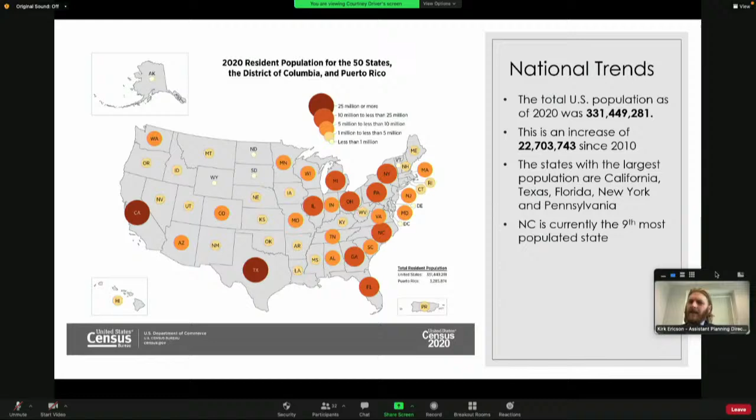That being said, despite those large absolute numbers, the US population grew at its second lowest rate of any decennial period since the census began in 1790, at a rate of 7.4%. The only period when growth was slower was during the Depression era of 1930 to 1940, and it was only 1/10 of a percentage point lower. So we've got some slowing growth as a country, and analysts are pointing to an aging population, decreased fertility rates, and reduced immigration from other countries as the reasons for that slowdown. Next slide.

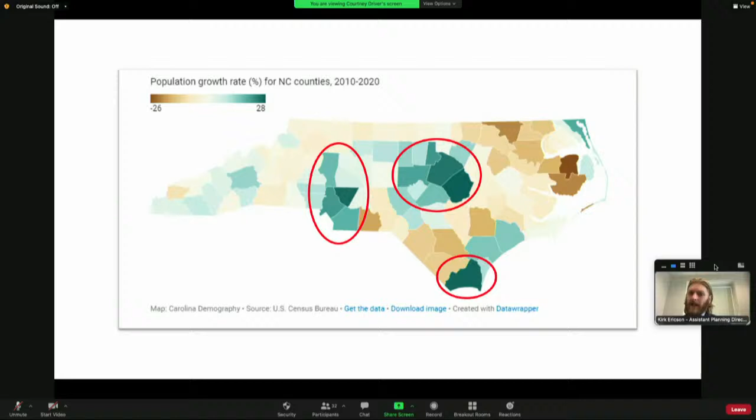Next slide. This is just kind of a visual representation of some of the things I was talking about. You can see those dark green areas are where population growth is the most significant. Again, there are major clusters in the Charlotte region, Raleigh, Durham, Chapel Hill, Cary, and New Hanover and Wilmington, that area, with serious population declines in the northeastern part of the state and the more rural areas surrounding the big regions in North Carolina.

So now I'm going to get into some detailed information about Winston-Salem and Forsyth County. This image shows Forsyth County as the backdrop. The yellow line represents the Winston city limits, and the rest of the data is broken up into census tracts, which are the most detailed data we currently have available from the US Census Bureau. As I mentioned on the last slide, Forsyth County's growth rate was about 9.1% in the last decade. Winston's was a little less at 8.7%. And as I mentioned, these are both less than our peer large cities and large counties in the state.

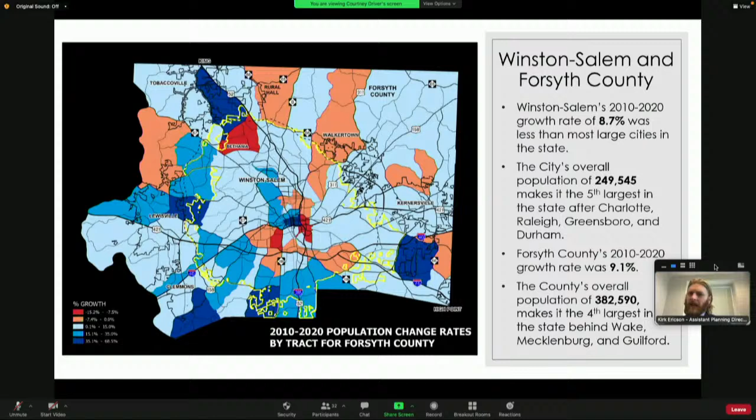And we're going to get back to some of those, what those colors mean on the map. We're going to get back to that in just a minute.

But before we do, I wanted to interject with a little discussion about the Legacy Growth Management Plan. This is important to keep in mind when you consider where growth is going in the county and also how that growth is affected by our municipal city-county sewer system.

The Legacy Comprehensive Plan is our long-term guide for growth in Winston-Salem and Forsyth County, usually updated every 10 or 15 years. We're at the end of the life cycle of our current comp plan. It was adopted in 2012 and 2013, and the county is currently divided into 5 theoretical growth management areas, with more intense development proposed for those urban and suburban areas.

On the slide here, the areas in shades of yellow are where that intense growth is proposed for, and the areas in green are where it's intended for future growth when services are available, or long-term conservation areas based on the challenges related to serving those areas with municipal services. The growth areas are largely within the Muddy Creek Basin, which you all know is the sewer service footprint for Forsyth County. Next slide, please.

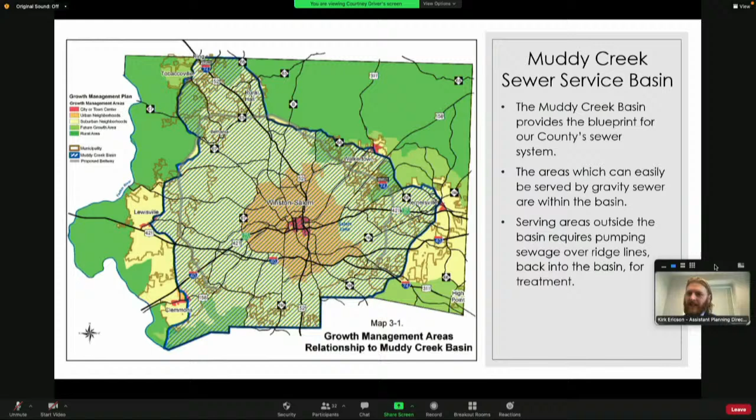So this is that same growth management map, and I overlaid the Muddy Creek Basin boundaries, which is the area that drains to our city county utilities treatment facilities by gravity, and you can see the vast majority of those suburban areas are within this basin. Just as a reminder, serving areas beyond this basin requires pumping sewage back over ridge lines and into the basin where it can go via gravity to our treatment facilities. Next slide, please.

So this is the same image that I had a couple slides back, where it looks at census tracts in the county and talks about what growth rates they had. But rather than having the city limits boundary on here as it previously did, I wanted to look at this with the boundaries of the Muddy Creek sewer service basin, because I think that's important from a city county utility service perspective of where is our growth versus where is our existing infrastructure.

The red areas on this map are the areas of decline. The dark blue areas are the areas of greatest growth. In the last decade, growth in our county was really concentrated in three areas: the western and southern suburban ring around Winston-Salem, which I've marked with the red cursor, the downtown area and the area around Wake Forest University, and the area south of Kernersville, east of the Winston-Salem city limits, that some folks are calling the heart of the triad.

Fortunately, most of this growth did occur in the sewerable basin. You can see there's a little bit west of Lewisville and Clemmons that was on things like package plants or private sewer or septic tank on smaller lots. Certainly some of that has occurred in the Union Cross area, but we've actually expanded sewer service to a large portion of that area. Next slide, please.

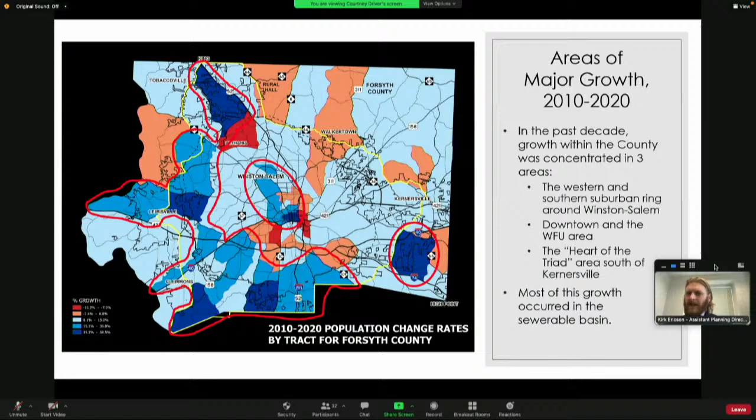I'm sorry, actually, did that? Okay, no, we're on the right slide, Courtney.

I switched the order. So talking about, that was a broad snapshot of growth, but this looks at the density of growth. So again, you have high density growth concentrated in the downtown and Wake Forest area. The yellow on the map is a real high density level of growth, which is no surprise to folks who've seen the increase in student housing facilities in Wake in the last decade and the increase in downtown and adjacent neighborhoods.

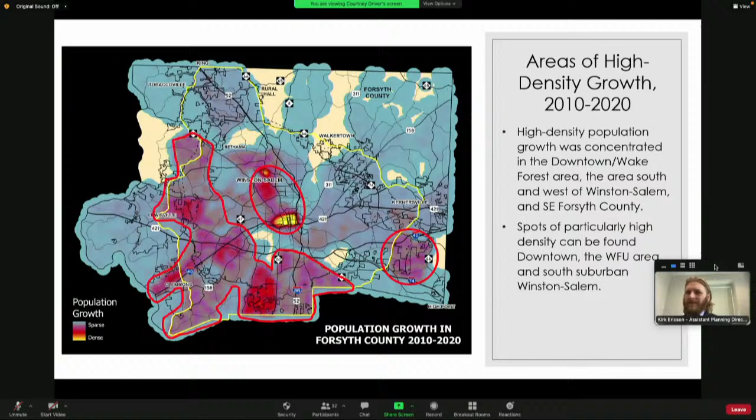So this is the slide that I thought I had previous, but this is a slide that shows where population has actually declined. The vast majority of the county has either had population growth or relatively stable population. Three areas did have negative growth, decline of between 7.5% and 15%.

And those are the older suburban areas north of Winston-Salem, the Bethania area, the eastern part of Ardmore next to Peters Creek Parkway, and also East Winston, the eastern part of downtown and surrounding Winston-Salem State University. Part of the reasons for this decline is just a loss of some of the younger families in the Bethania area, folks moving on, growing up, leaving the nest, and their families still owning the same house and just having fewer folks living there.

In areas like the eastern part of Ardmore, you actually saw some units that had previously been multifamily conversions being converted back into single family residences. You saw some reduction in apartments or similar facilities there. And in eastern Winston-Salem, right next to the downtown area, you saw some temporary closures of multifamily facilities as that area goes through some reinvestment and development projects.

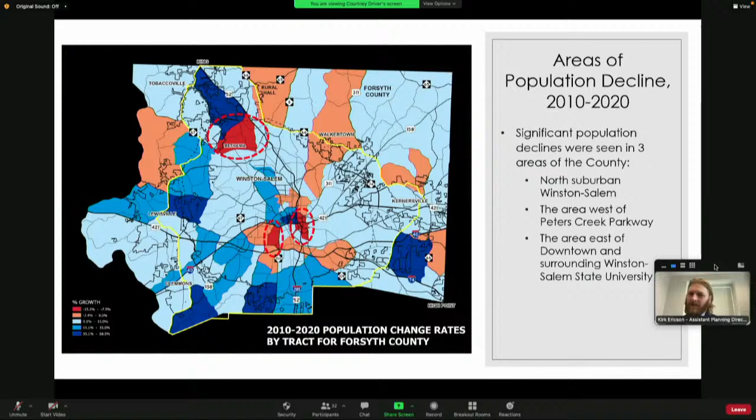If we could go to the next slide.

So where does all this data leave us? What are the implications for the Utilities Commission to consider? I think what we saw is that the densest growth in the county in the past decade was, for the most part, concentrated in the existing sewer service basin. So that's a good thing. That means the policies of the commission, utility staff, planning staff, council, and the commissioners are all in sync in terms of guiding growth to where we have basically municipal services to feed that growth.

The areas of high growth outside the basin were found west of Clemmons and Lewisville, and south of Kernersville. I don't think those factors should be a surprise to anyone who has spent any time in this community. Some of that growth is at a density of development that doesn't make sense to serve with sewer, although it does show there's an appetite in those areas to maybe consider some expansions.

So the question that I would put forth to staff and the commission is, based on recent growth patterns, are there any areas within the existing sewer system that would benefit from upgrades or capacity expansions? I know Courtney's already shared with me some of those in the past, and you all are aware of those as well - upsizing lines or putting in new expanded capacity pump stations, things of that nature - but all of that is on the table.

If you would go ahead and advance, please. So this map, the dark blue line on the left-hand side is the Yadkin River. You'll notice in the upper left-hand corner, the Northwest Dam is one of our intakes, and further down on the Yadkin is Idols Dam. The Weaver fire is about the middle and top, marked with the red star with the white center. The runoff went into Monarcas Creek, which ultimately ends up in Mill Creek, then Muddy Creek, and then the Yadkin River below our Idols intake. So that's essentially the lay of the land as far as impacts from the runoff of that fire.

As I mentioned, it did not impact our operation at all. I did talk with DEQ Public Water Supply, and they did not issue any notices to utilities downstream of the confluence of Muddy Creek and the Yadkin. So if you could go ahead and advance.

This is just kind of a very brief rundown of what happened that night. At about 7:30, Swann noticed increased demand, so they went up on production. About 8:30, Courtney received a call from Chief Mayo of the Winston-Salem Fire Department, requesting assistance with pressure and supply.

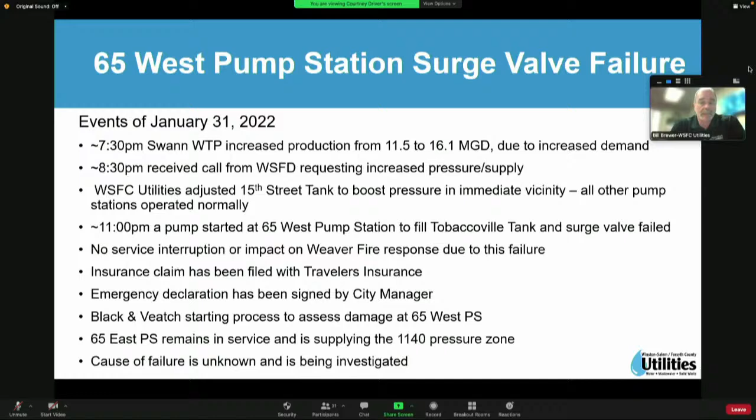Bill, this is Chris. If I could just ask, so you don't really have an estimate on what the cost is going to be until Black and Veatch does their assessment? That's correct.

So the picture on the left is when our maintenance staff showed up to the pump station after the surge valve failed. You can see the water running out the door. The picture in the middle is the actual surge valve. Now everything on the blue pipes, the 2 blue pipes that's brown, was underground. So you can imagine the force that it took to knock this thing out of the floor like that.

Also, that yellow line that runs kind of diagonally, that's the glue from where the trim was on the floor. So the floor actually dropped almost 3.5 feet. And then the picture in the lower right-hand corner is the back of the station. Until our staff got out and could turn the pumps off, we were pumping about 7.5 million gallons of water through the bottom of that station, basically. So you can go ahead and advance the slide.

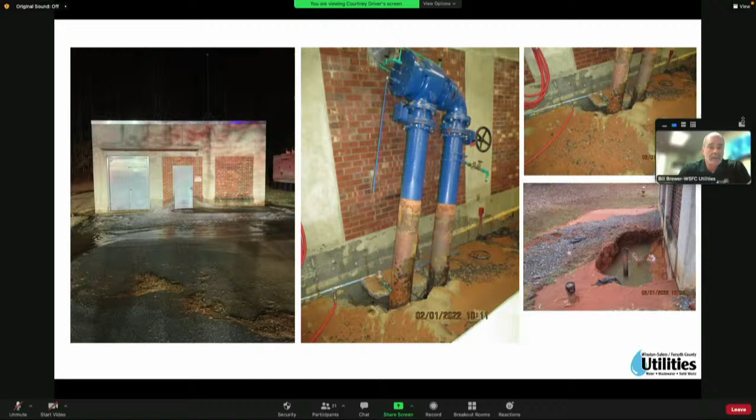Bill, do you also believe this is going to be covered by our insurance? Yes, it is. They've already told us it is, and the engineering will be covered as well.

Good. So, hey, Bill, I was going to ask a similar question. What makes this an insurance claim versus something else, some other failure? Does it have to do with the fire and the demand from the fire, or are we covered for this in normal circumstances? Yes. We're not sure if it's related to the fire or not - it's a little too early to tell. But it is covered under the conditions of our policy, and I think it would be covered either way. Okay, thank you, thank you.

So the picture on the left, this storage cabinet here just shows you the level of the water inside before our folks were able to turn those pumps off. And then the one on the right shows a little better the magnitude of how far that floor has sunk.

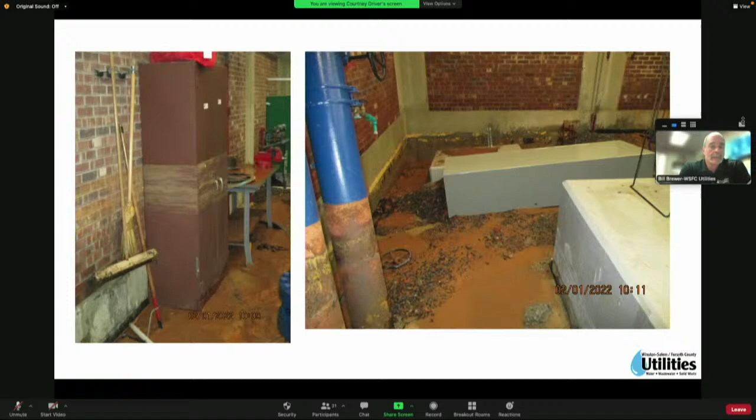And I believe that is the last slide. Yes, thank you, Bill. Does anybody have any questions for Bill? Thank you, Bill. Yep, thank y'all.

I do have one quick question. So Bill, based on, I guess this will have to rely on Black and Veatch to check this out, but based on what we found here, do we know if there are other weak spots in the system as a result of this? Could this be on the edge of... Well, we are going to look at, obviously, the piping under the station, because there's several lines associated with the way the pumps are routed, the discharge and the suction side. And we're also going to look into possible fixes - the equipment in the station to perhaps prevent this from happening again in the future. There may be some different operational setups that we could use that could maybe prevent this.

Sure. Good, thank you. I've got a question. How many pump stations do we have similar to this one? Similar to this one, there's only 3. There's 7 total, and they're all similar in some way. The 3 that I'm talking about don't have a tank associated with them - they're just standalone pump stations. The other 4 have actual tanks associated with them. Okay.

So far this fiscal year, we've issued 23 water and sewer conveyance agreements, totaling about $6.8 million. This next graph shows the breakdown in water and sewer mileage: about 5 miles of water mains and 3.5 miles of sewer mains.

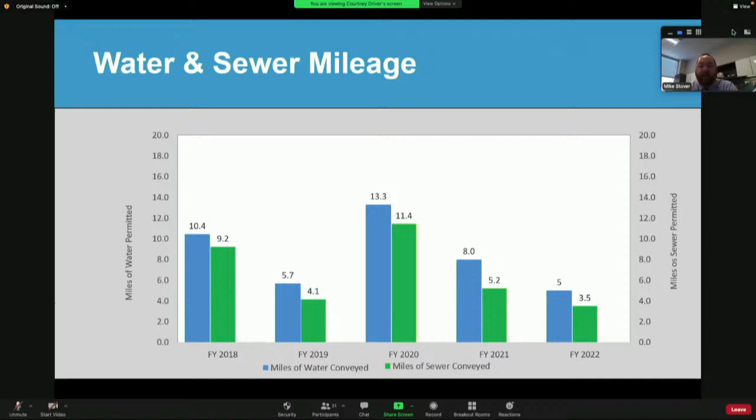Now we'll look at rainfall data. We've been lucky recently. We had a very dry summer and fall, and we got about 4 inches of rain in January. So Forsyth County is not under any drought conditions right now. The middle part of the state is abnormally dry, but Forsyth County is in good shape.

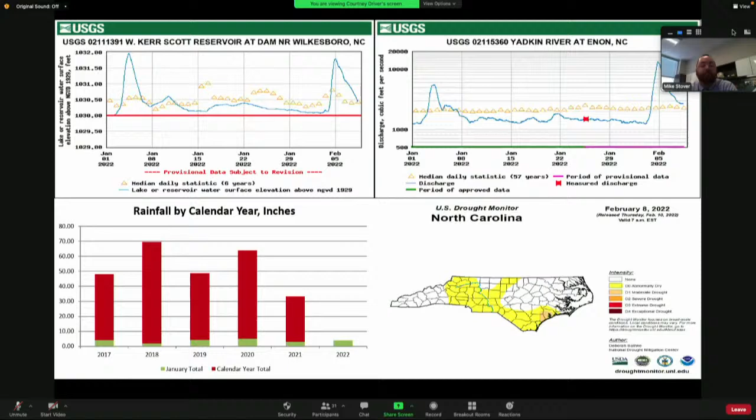Water production is very close to our 5-year average. We actually produced about 1 MGD, 1 million gallons per day more than we did at this time last year, for a total of 33.6 million gallons per day in January. Again, we received almost 4 inches of rain in January, compared to the average over the past 14 years of 2.8 inches.

Water quality sampling at our 3 water plants totaled almost 27,000 samples in 1 month. We fielded 26 water quality calls and had 0 drinking water violations for the month of January.

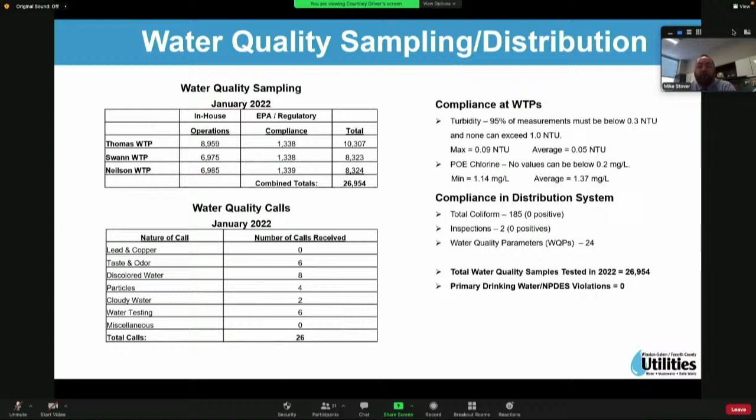Collection system update: the only report we've received since we met back in December was for October. We received 1 notice of deficiency, 3 notices of violation, and 0 intend-to-enforce letters. We're still waiting on November, December, and January's reports.

Got some good news here with sanitary sewer overflows. You can see where we're tracking compared to 2020 and 2021. We're still well below, and just a reminder for the group, 2020 and 2021 were both record years as far as lowest numbers on record. Right now we're tracking below both of those, so hopefully we finish out the year strong and set another record.

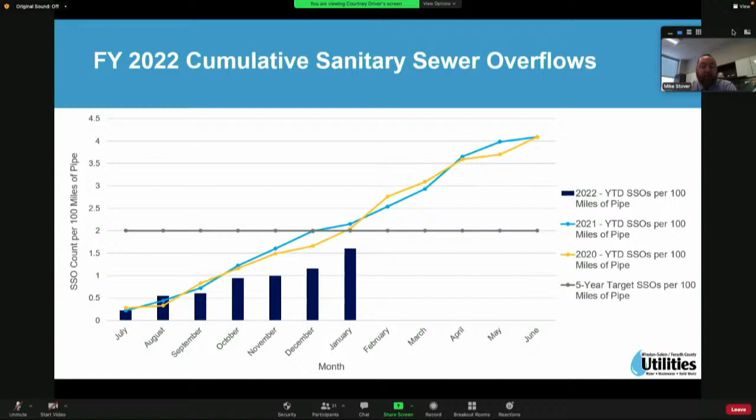This graph shows SSOs by cause. We had 6 for the month of January, which is pretty close to the 5-year average trend line. 2 of those are classified as other — one was related to a contractor mishap, the other was a bypass pump failure. There were also 2 pipe failure related SSOs and 2 O&M related SSOs.

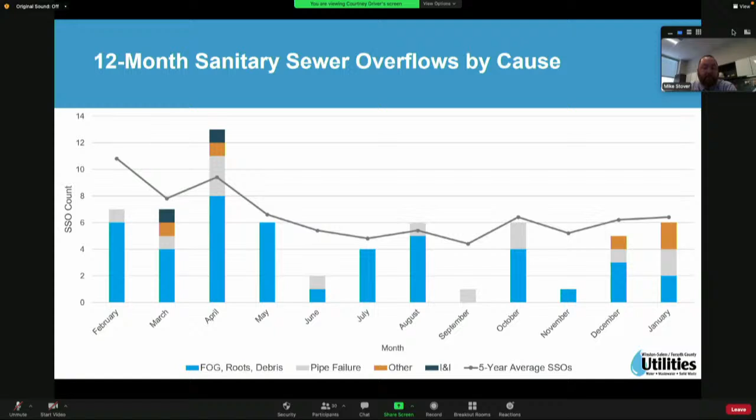Cleaning productivity, we're still well above our 10% permit requirement, still tracking below the 20% goal. That goal is set to keep up with our scheduled cleaning requirements in order to avoid a backlog. As I mentioned in previous months, the vacancy rate is contributing to that gap, both internally and with our contractor crews as well.

Financials, got some good news here as well. More of the story, we are spending less than we budgeted for and collecting more revenue than we anticipated. Through January, we have spent $25.7 million, and we were budgeting around $30 million at this time. And from a revenue perspective, we've collected $74.6 million, as opposed to around $70 million which is what we were projecting.

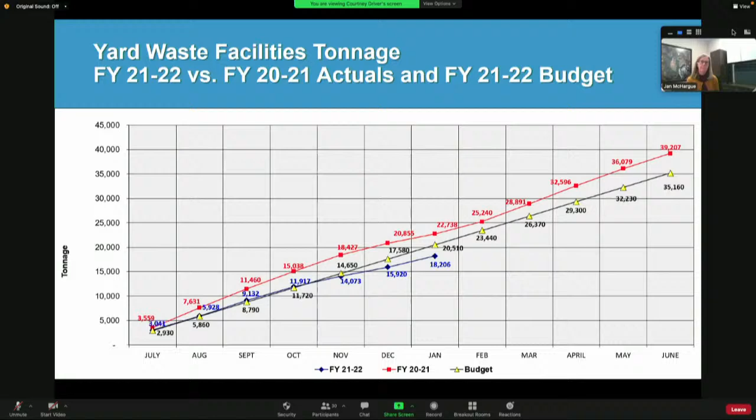So in conclusion, just a couple of miscellaneous updates, and then I can answer any questions. We mentioned the winter weather events we had in January, and we had to close one day. We did have reduced activity several other days, so we had reduced tonnage and revenues due to that. The weather also impacted our ability to do some site maintenance and repair work we had planned. While Old Salisbury Road landfill is closed, we had hoped to catch up on some of the site maintenance, so that's been delayed a little bit. As Courtney mentioned, Old Salisbury Road is still closed. We extended that and plan to evaluate our staffing situation over the next couple of weeks, and should be able to target a date to reopen that facility, hopefully in March.

Jan, have you had any complaints from the contractors that it's not available to them, having to travel farther? Surprisingly, I have not. That's not to say there aren't people impacted, but we haven't heard much from those customers. We are seeing increased activity at Haynes, so I think they're bringing a lot of waste to that site. It's just that the weather was so bad in January, everything was reduced, including construction activity as well as other waste hauling.

Okay, thank you. So lastly, I wanted to give a quick preview that we plan to have HDR attend next month's meeting so they can give us an update on the permitting progress towards the mechanically stabilized retaining wall that would expand the vertical capacity at Haynes.

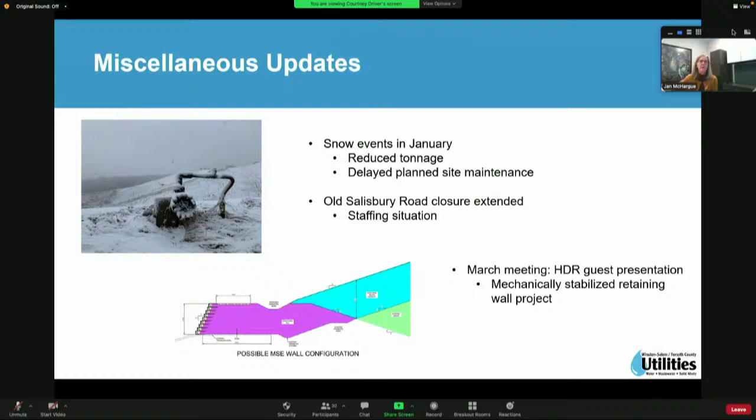I think that's everything I had prepared, unless you have questions about any of it. Thanks, Jan. Thank you.

Okay, next I'll present the agenda items. We have 11 items. The first item is approval of minutes from our December meeting.

The second item is a resolution authorizing execution of various agreements regarding proposed water and sanitary sewer improvements to be installed within various developments, with no refunds. There are 11 total projects, with the estimated water cost to be conveyed to our system at $844,500, and the estimated sewer cost is $1,710,830.

Item number 3 is a resolution authorizing acquisition of a water easement by donation for the Muirfield Village Waterline Extension Project. This subdivision has private utilities, and they extended a public water line that they designed to our standards. They conveyed it to us for our maintenance and system, and now they're donating the needed easement so we can maintain the infrastructure.

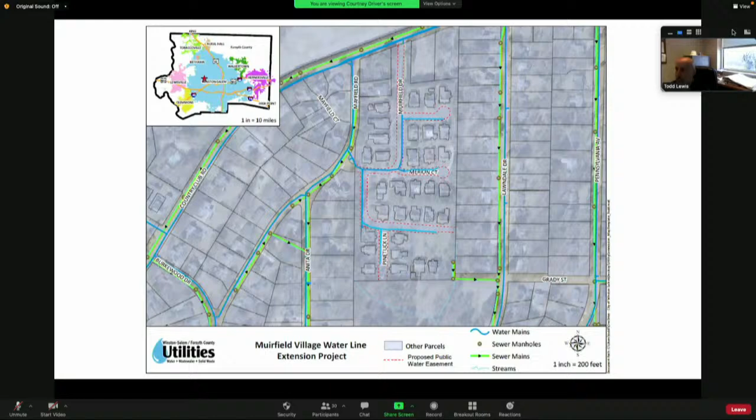Item 4 is a resolution authorizing the acquisition of easements by deed, condemnation, or dedication for phase 1 of the Peters Creek outfall replacement. This is an outfall that has reached capacity and is not sized for wet weather flows, so it was identified in our CSIP program as needing to be replaced. This resolution authorizes easements for that project in the total amount of $17,925.

Courtney, Todd, is the replacement the same size as the old line? No, the replacement will be a larger size due to capacity. Well, we just got through listening to planning telling us we need to be, so I'm just making sure. Okay, thank you. Yes, you're welcome.

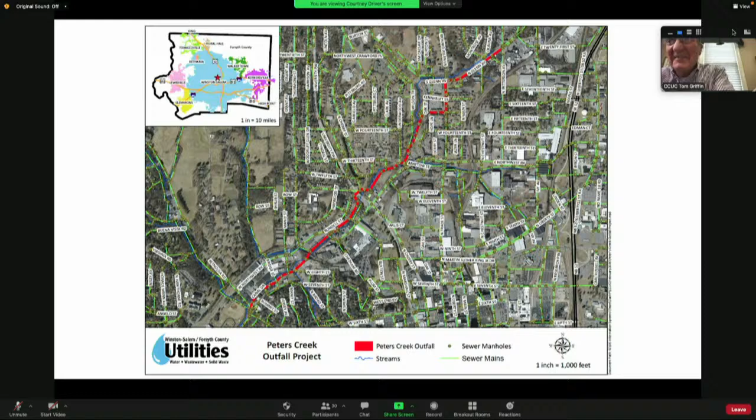Item 5 is a resolution authorizing acquisition of easements by deed or condemnation for phase 1 of the Sprague Neighborhood Sewer Rehabilitation Project. This was also identified in our CSIP program. This area is in need of extensive sewer rehab based on the condition assessment performed, and this resolution authorizes the acquisition of easements in the total amount of $14,035 needed for this project.

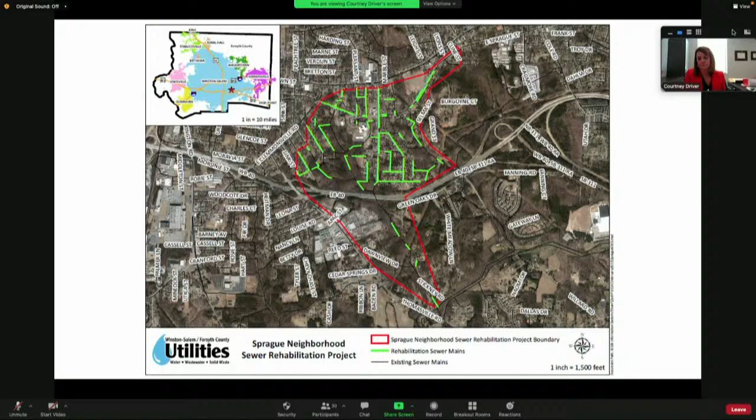Item 6 is a resolution awarding a contract to CITI for software configuration and programming services, closed circuit television and access control system upgrades for the Nelson Water Treatment Plant. CITI is our preferred integration vendor. They were selected through an RFP process. They have done similar work at all of our other 4 plants, facilities at Muddy Creek, Swan, Thomas, and Elledge. And so now we have requested that they do similar work at Nelson in conjunction with our modernization project.

So we negotiated a fee with CITI for $1,007,820 to do this work.

Hey Courtney, this is Chris. This may be kind of a question for Bill Brewer, two questions. I remember going over to see the new project that we were going to be doing about a year ago, what was proposed. And I was thinking that the estimate was 108 to 110 for that renovation and upgrade of Nelson. There were a few things in order for us to get that price range that we did not include in that estimate. So my question is, was this included in the original estimate, or was that outside of that original estimate? And number 2, maybe if we can get an update on how that project is going.

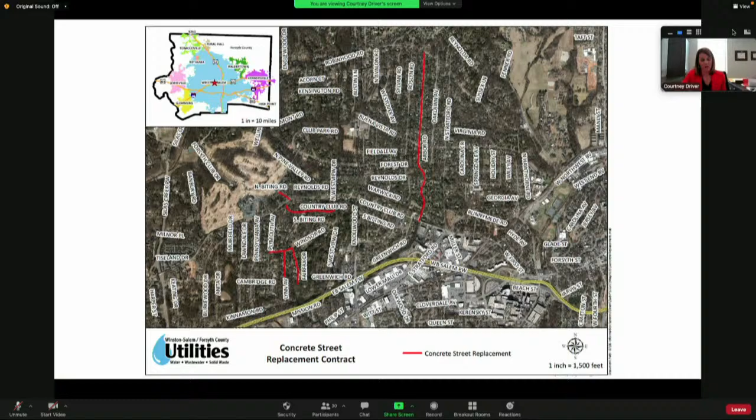Okay. All right, so we are on item nine. And there's a map for that.

Okay, so item nine is a resolution awarding a contract for the Kernersville Sewer Rehabilitation Project. So bids were received for this project in May of 2020. At that time, the bidders were instructed to submit separate bid pricing for three work packages based on geographical location, so there was a package A, B, and C. The commission awarded package A to KRG in June of 2020. And at that time, this was right at the beginning of the pandemic, and we didn't know what our financial impact was going to look like or how that would, what that would be. So we didn't want to commit ourselves to spending major capital dollars when we didn't know exactly what we were getting into.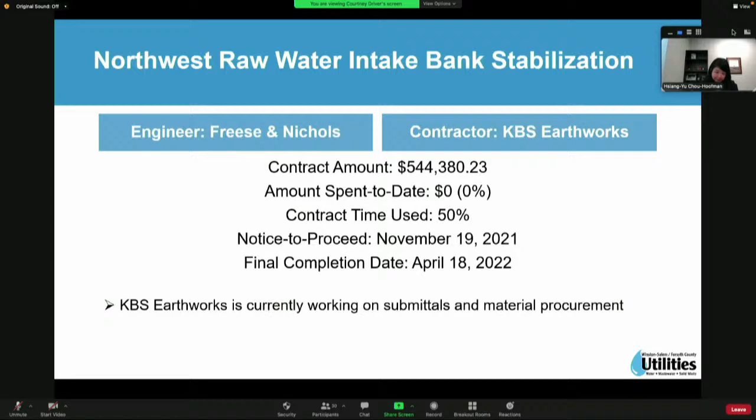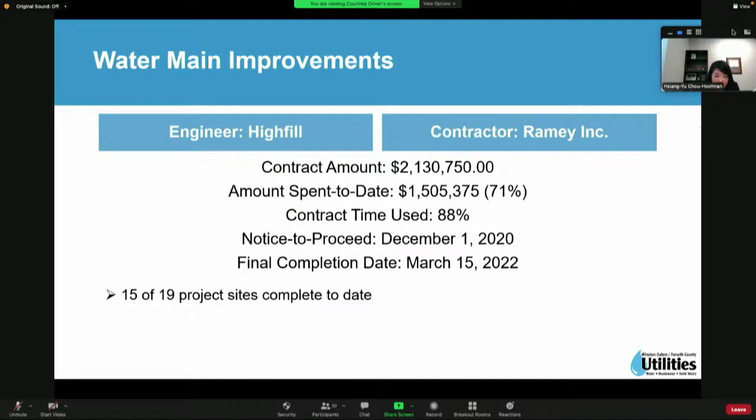Water main improvements - the amount spent to date is a little over 1.5 million. This project should be completed very soon, in March, next month I believe.

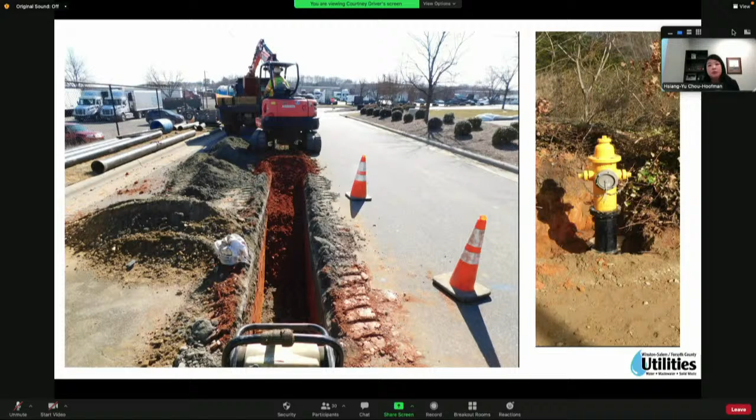Here is the picture: to the left is the pipeline installation at Angel Road, and to the right is a new hydrant installed at Woodbine Street. Here you can see the progress map for this project - they are still working in Kernersville. The yellow lines show what they're currently working on, green is what's been completed, and red is what's left.

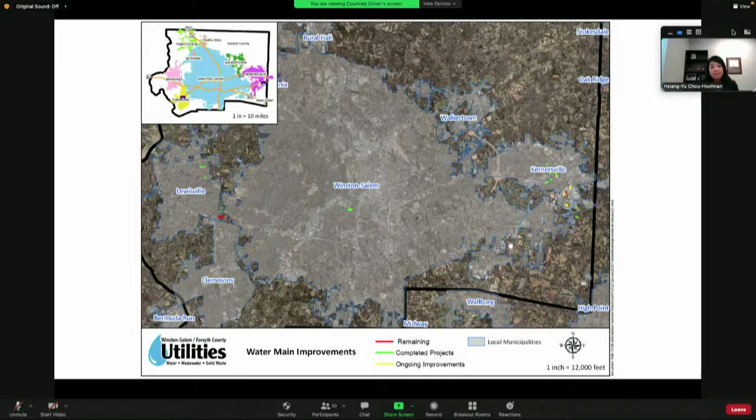System-wide sewer rehab phase 3 - the contract amount was a little over 3.3 million. They had finished Arbor Road and have started rehab work on High Point Road.

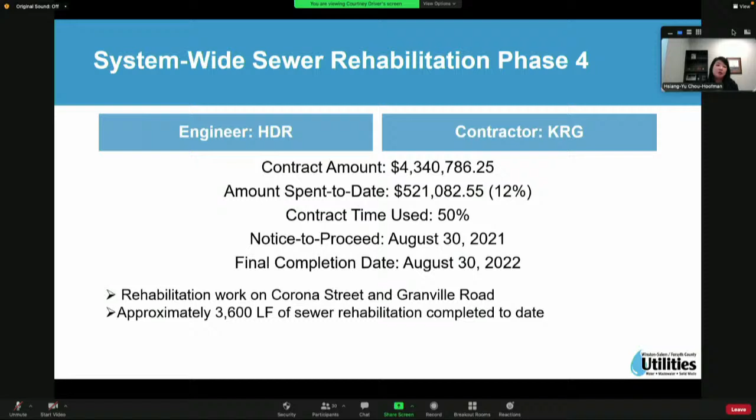System-wide sewer rehab phase 4. We've used about 50% of our contract time. We've started rehab work on Corona Street and Granville Road. So far, we've done approximately 3,600 linear feet of rehab.

Here is the project map. It's a little all over. The red dots are what we have to complete, the green is the work we've done, and the yellow is what we're working on.

The picture to the left is KRG getting ready to do a pipe burst. You can see the burst head on the ground to the left and the new pipe. The picture to the right is KRG helping us put the sleeve on when the Tanglewood Force Main was leaking about 2 weeks ago.

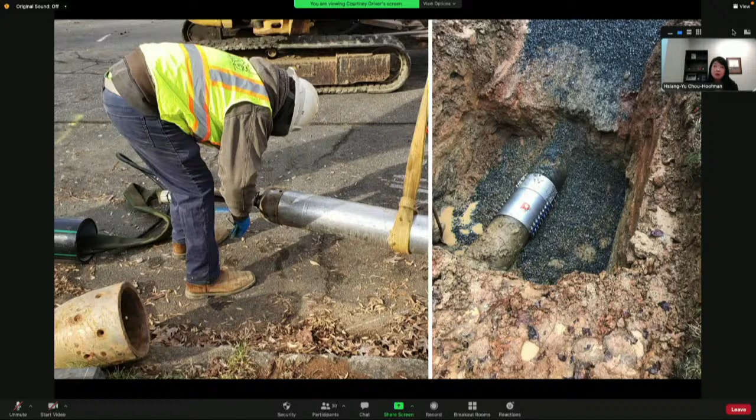I think this is the last one: Avonlea, Martin Mill, Lowry Street. Our contractor is Baker Underground. We've used about 60% of our contract time. All of the Avonlea lift station upgrades have been completed and they've started work on Lowry Street. It should be done in March.

Are there any questions for me? Happy Valentine's Day. Oh, thank you, Shane. Well done as always.

I'm not sure if this is a question for you or for Mike Stover. Where do we stand on our fire hydrants? Are we keeping those within a certain number of days when we get reports from the fire department or from an accident that needs repair? I know I may be putting you on the spot, but it seemed like a while ago we were getting behind on them, then we started putting more attention and catching up. Where do we stand recently?

Mr. Parker, we're currently on the third hydrant replacement contract. I can't remember exactly how many we've done or how many are left, but we've substantially knocked that backlog down with these contracts. Usually, once we get enough backlog to create another project, we'll come to you with hydrant replacement contract number 4. We've been trying to keep that window to less than a year. We're doing probably better than we ever have, but people can't drive, they hit them every day.